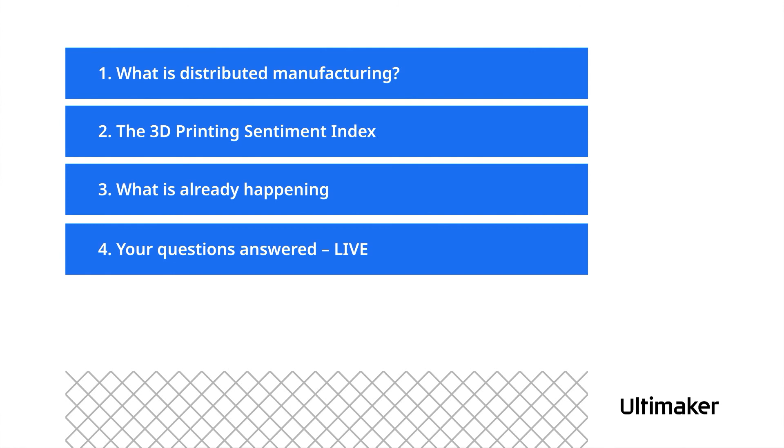We're going to share a favorite case of ours, the Schubert story, that we've shared as an Ultimaker story before, and that really exemplifies what's possible for this process. And then we're going to discuss with you ways that Ultimaker unlocks these possibilities with the Ultimaker S5 Pro Bundle.

Let's start out with the basic concept of distributed manufacturing. Now, some of the viewers have been practicing these kinds of techniques for years. You know Lean, you know a lot of the methodologies that have informed this. Others of you are hearing about this for the first time. So I want to get everybody on the same page so we can all benefit from this exploration. So I'm going to start with Ultimaker's mission statement. Ultimaker's mission is we are here to help accelerate the transition to digital distribution and local manufacturing.

Let's take a look at these terms from two perspectives, from the virtual and the physical. So digital distribution, creating digital parts and products and processes so that you can send them to various places. And then on the physical side, you can produce these parts where you need and how you need them. You can use the digital models that you have for the parts and the processes to help you actually make manufacturing aids as well that will help you to more easily produce these items.

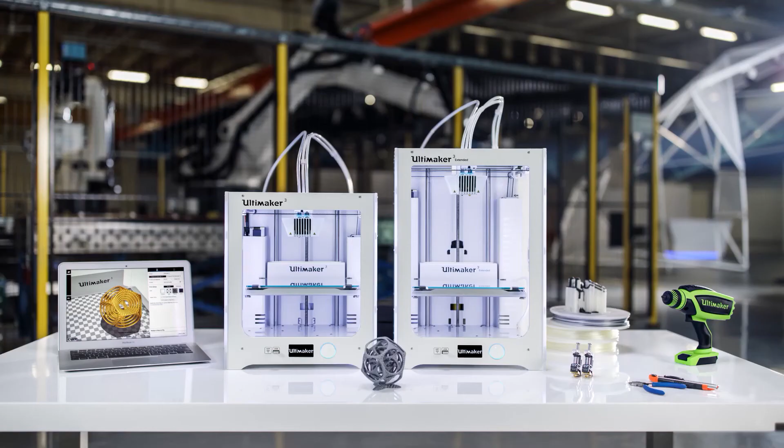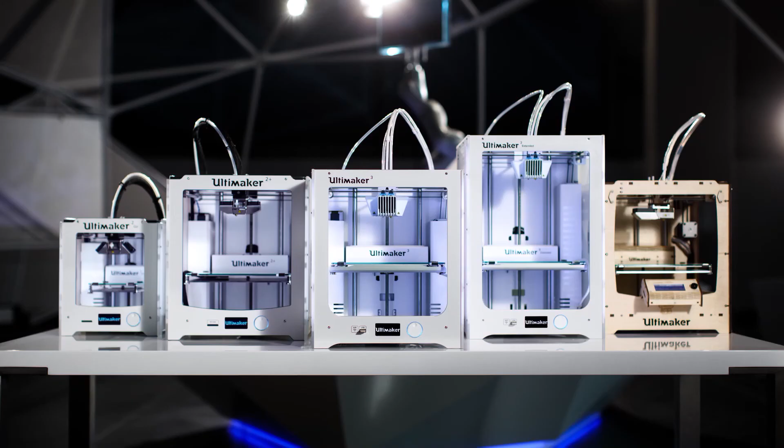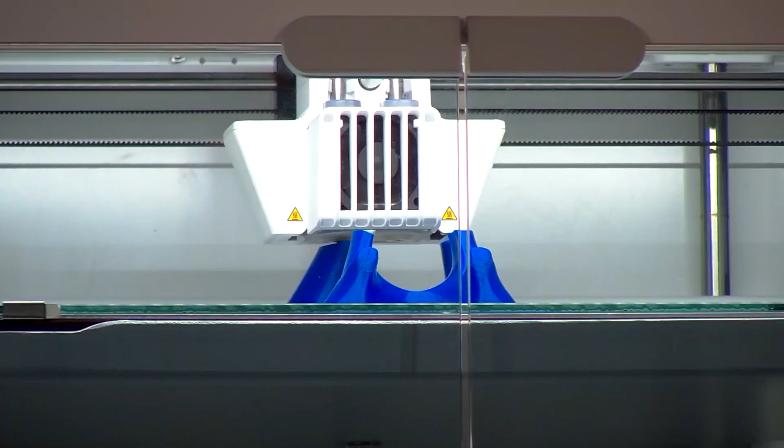So we discovered these concepts from working with our customers. From the very first years of Ultimaker, we started seeing Ultimaker Originals, Ultimaker 2 Pluses. We saw them showing up in all kinds of contexts, serving all kinds of roles that we didn't guess from the very beginning. And then with the launch of the Ultimaker 3, we saw a number of our units start to show up in manufacturing chains, in factories, and in global companies that were sending files back and forth for design review and part review and even fabrication guidance. So we really believe that this principle can make a difference.

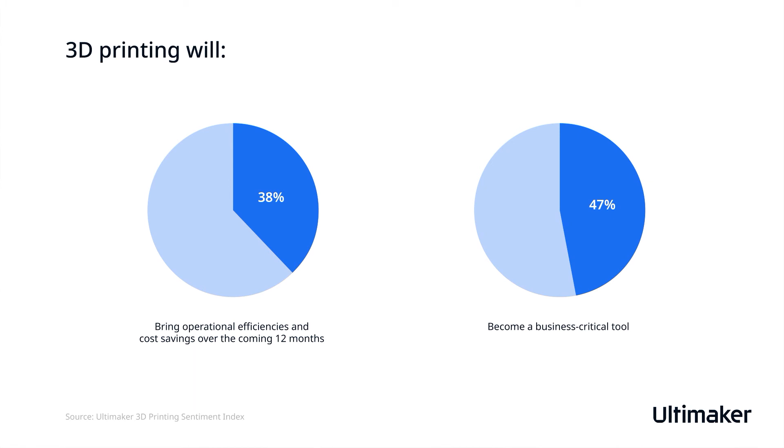To confirm our thinking around digital distribution, Ultimaker commissioned an independent research company to survey a wide range of professionals across the world. And this revealed that over 1/3 of the respondents expect that 3D printing will bring significant operational efficiencies and cost savings to their business over the coming 12 months. And almost half believe that 3D printing will eventually become a business-critical tool. So we know that our industry and growing customer base are demanding this route to accomplishing their goals. We really think that Ultimaker is a perfect candidate to help them carry this forward.

We're going to sit down now with an Ultimaker expert who's going to help walk us through some of the things that are happening even today to usher in this new era of distributed manufacturing. So I'm sitting here with our Ultimaker expert, Peter, and we're going to explore in detail a conversation about distributed manufacturing. So first, Peter, introduce yourself. What's your background at Ultimaker?

My name is Peter Overgouw. I've been with Ultimaker for over 6 years. Right now I'm the application engineering manager for EMEA. We are part of the business development team, and that means that we are working with the global OEMs, and we help them identify applications, and applications are 3D printed products, and we help them define a business case about these applications. So if we have these applications covered with a customer, we help them develop these applications and adopt 3D printing in the company.

So how do we bring distributed manufacturing to these customers? Distributed manufacturing is key for these customers. So of course we have to bring value to them. 3D printing has a lot of opportunity and it should be scalable for them. So it's all about being flexible, being able to print a part where you need it, when you need it, and this is what we can offer them. So Ultimaker, we offer the hardware, we offer the software and the materials, and also we provide our customers with the right knowledge to produce these applications, to engineer it, and we think with them about how to do that.

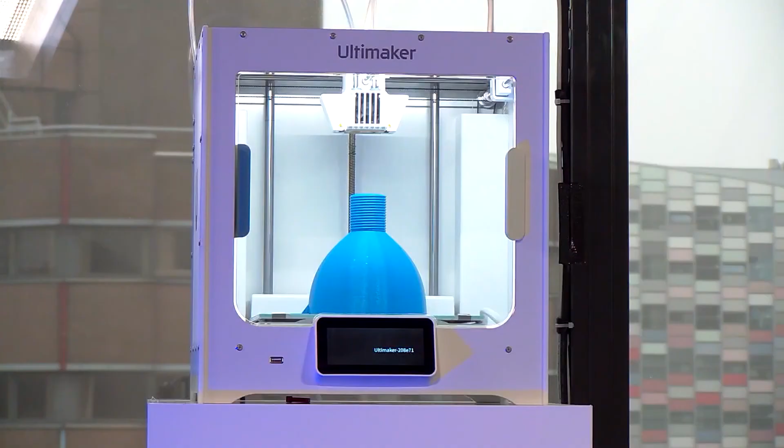So this way, we train our customers to do it, so they can scale globally to create a lot of value. So I want to start with the first signpost, this concept of the evolution of the supply chain. So how do you see the supply chain transforming for our customers?

So a lot of our customers have big lines, and it can be assembly lines, production lines, all kinds of lines. And what you see is that in all these lines, they have a lot of parts involved. It can be for automation, it can be for quality control. There are a lot of opportunities there. And you see that some of these parts may break down, or you need some new parts, really custom to your product.

And normally what companies were doing was, of course, designing the parts and ordering these parts at their manufacturers. And they had to mill it, they had to lathe it, there are all kinds of manufacturing techniques that they had to take on to produce these parts, and that took time. So of course you've got to analyze the model, you've got to prepare it for manufacturing, you've got to manufacture the model, and this all takes time. And in the end you've got to pack it and ship it to the customer who ordered it.

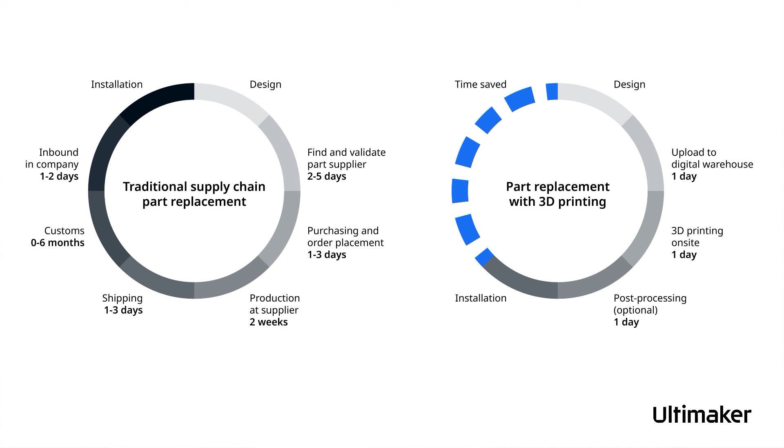And the thing is, what we're seeing right now is that they are adopting 3D printing more and more. So if you put a 3D printer next to your line where you need the part, you can imagine that it's a lot faster than ordering a part elsewhere. Because if you print it right next to your line, you can skip all this time loss it takes to order a part, because the part and the manufacturer should be in your financial system already.

If they're not in your financial system, they need to make that. They've got to create an account in their system. Then they need to order it, so probably it needs to go to purchasing, and then all the other steps I just mentioned with shipping, you can save because the printer is right next to your line. So basically, if you design it and you print it right there, you can save all this time to get it right out.

And when we were talking about this earlier, you were mentioning how sometimes these parts are made at an urgent time expense, sent rushed over to a site to use. They might even get lost on the way to find the person that needs them. So this really not only compresses a lot of the various steps, but the people who really need it are the ones that are seeing this process and making sure that the part is ready for them where they need it. I thought that was really an excellent concept.

Yeah, and to further your point, we even see with customers that they are moving up to a next level in their industry, getting parts in, but also working with their suppliers to improve 3D printing. So our customers are working with 3D printing already, but now they're asking their manufacturers to start thinking about 3D printing as well. So we can see that the adoption is growing, that companies are already thinking of 3D printing in the future and how to bring that forward with their manufacturers. So those time savings and optimization benefits are going up and down the traditional supply chain line as well.

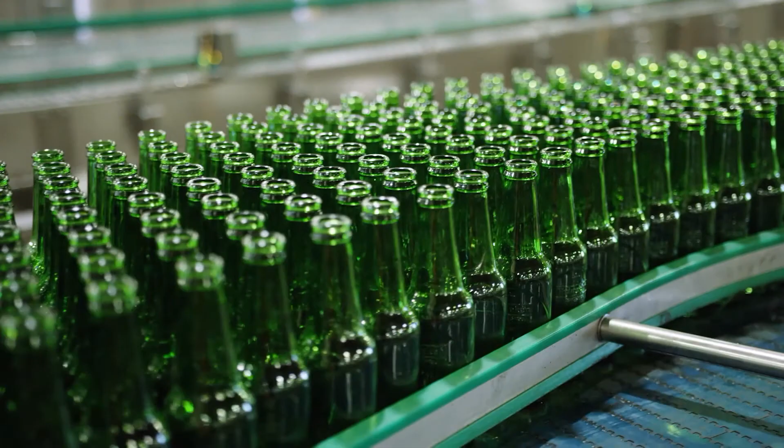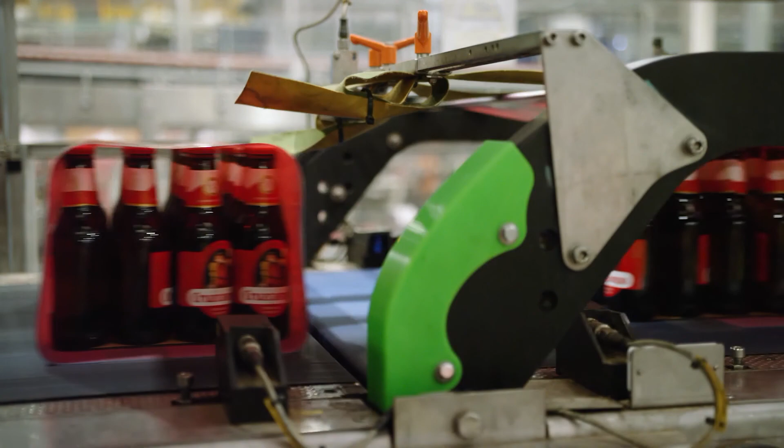Yeah, so what we do with all of our customers, and I think Heineken is a great example, is that, of course, we have a look with them. How do you identify applications? We look at what parts are you replacing, where are your costs, where are your issues in this line? Because sometimes if a part breaks down, it takes them a long time to get this part in, especially for the reasons I mentioned earlier.

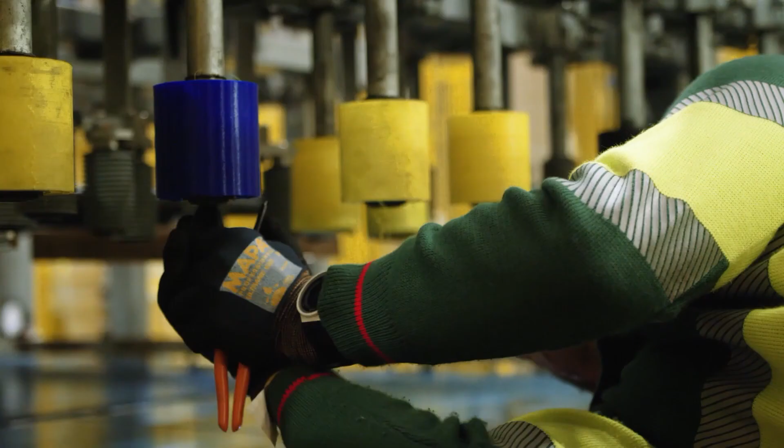But you can also imagine that if one of these Heineken breweries is in a specific location that is hard to reach, in a country where the organization is not that high as other countries, and a manufacturer ships over a part they ordered, it can even get stuck in customs, and the line is still broken down, it's not running, so it's costing them a lot of money to get it up again.

I remember hearing that for some of these distant sites, they're solving that problem by bringing manufacturing closer to the local need. They'll have a secondary facility just full of replacement parts, to make sure that local fabrication plant keeps running. And so when we talked about things going digital, let's talk about what it means to have a digital warehouse of all these parts that you can draw from. Where are you seeing that kind of strategy adopted among our customers?

We see that more and more. So the bigger customers we focus on, they really want to go global. So they have to open up these possibilities for their employees to 3D print these products. The thing is that it's not possible for everybody to create this design. So they really want to share this digital file.

And you can see with our customers, if they're growing and opening up multiple sites, they want to share their knowledge. So they're building these centers of excellence, or a digital warehouse basically, where there's knowledge, where there are these files, and they are making it possible for these employees to just download the file and press start on a printer right there on their location, and the part just comes out.

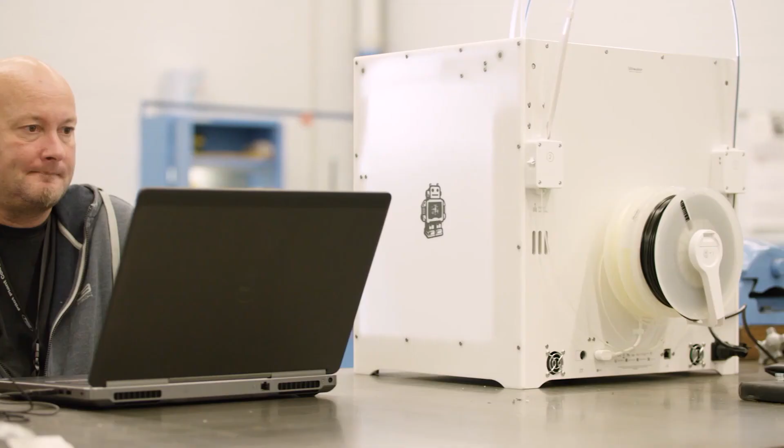Do you have any customer stories of people who are starting to explore using parametric parts right there for solving problems? Yes, definitely. So this becomes a bigger topic, of course. So like I said, it's not easy for everybody to design. So making it easy to design is critical. So what we see with, for example, Ford, they use Trinckle. And with Trinckle, you can just load a CAD file, you can just put down some points there and it generates a file. So it's really on dimensions and it's accurate, and then operators can even do it to generate this file and 3D print it right there.

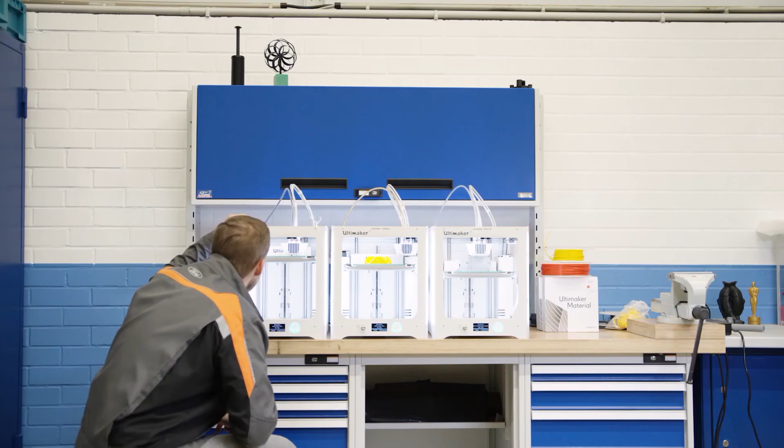When you're talking to customers about these opportunities, helping them as you're walking through sites and identifying things that help them understand how they can use 3D printing, how do you talk to them about this future vision of where they could go, and also about the examples that are already here in place among the other customers you're working with? Yeah, so at first when we go to these customers, often they have an idea of what they want to 3D print, but they do not really know how or anything. And then we see that they are already really focused on this application.

So at first we have to think with them. We've got to inspire them. So we think of like, what kind of company is this? What is all possible here? Because many times there is so much more possible than what they are already thinking about. And most of the times it's not that hard to do it. So we can already do a lot of applications they want to print with really basic materials, polymers. It does not even have to be metal. Often we are even replacing their metal parts with polymer parts because it's not really needed to use metal in some places.

So by showing them how easy it is and how plug and play the machine is, and everything we offer gives them already a good feeling about 3D printing. Of course, the next step, like inspiration, is that they can grow this, they can scale this to different locations. And you can already see that with some companies we are working with, they are really thinking about the future. How is 3D printing going to look in our company?

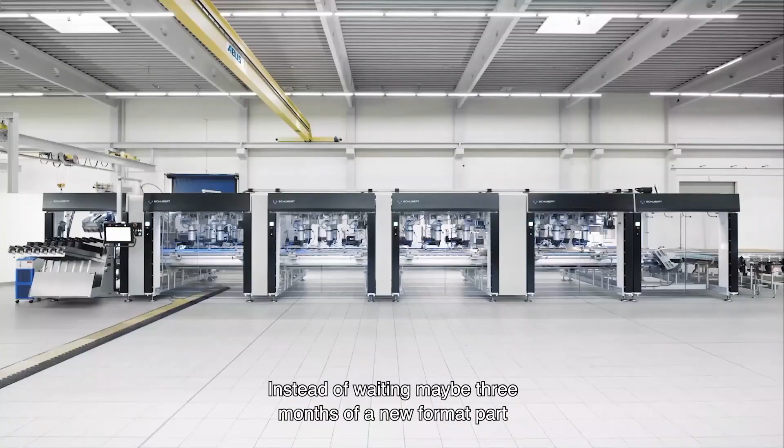Instead of waiting maybe 3 months for a new format part, we are now able to send him the file within 2 weeks. So we reduce the cycle time enormously.

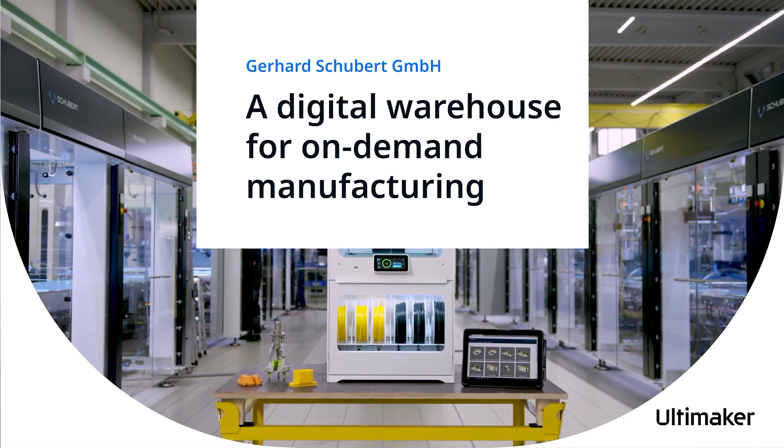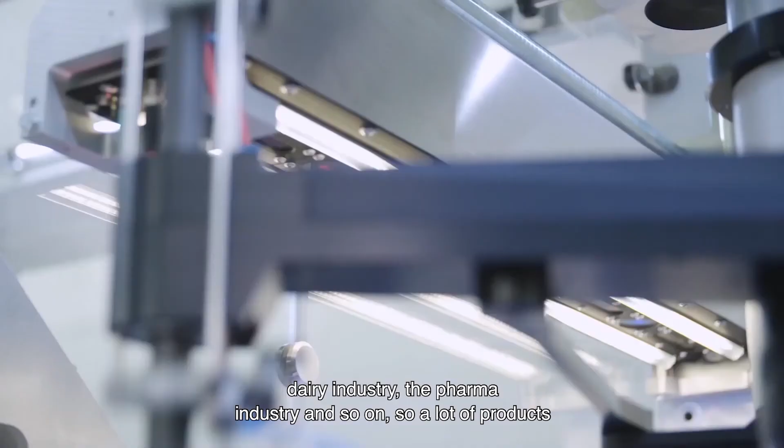My name is Markus Schindler. I'm responsible and head of the materials management here at Gerhard Schubert. Schubert designs and builds packaging machines for the food industry, dairy industry, the pharma industry, and so on. So a lot of products from the supermarket get packed by a Schubert machine.

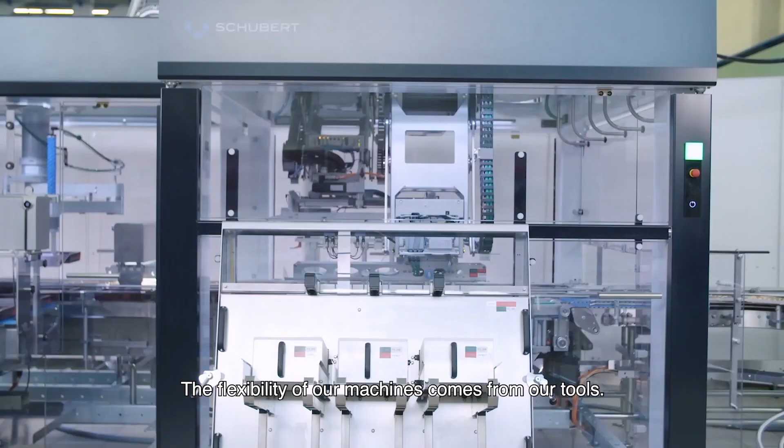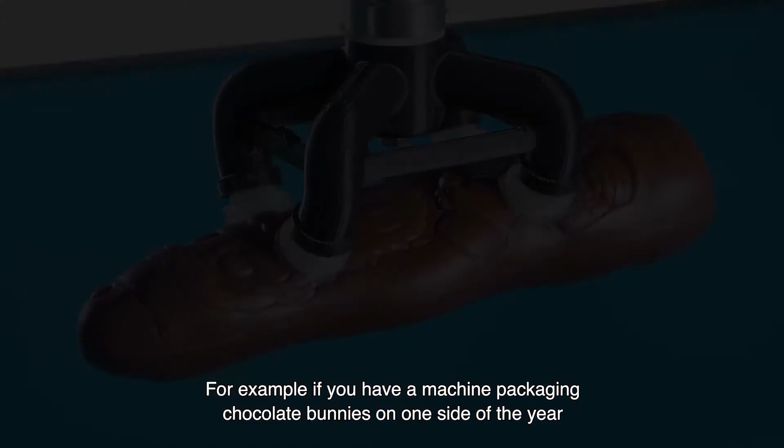The flexibility of our machines comes from our tools. We set up tools on our robots, and the tools are as flexible as the product itself. For example, if you have a machine that's packaging chocolate bunnies one half of the year, and then the other half of the year chocolate Santa Clauses, you only have to replace the tool.

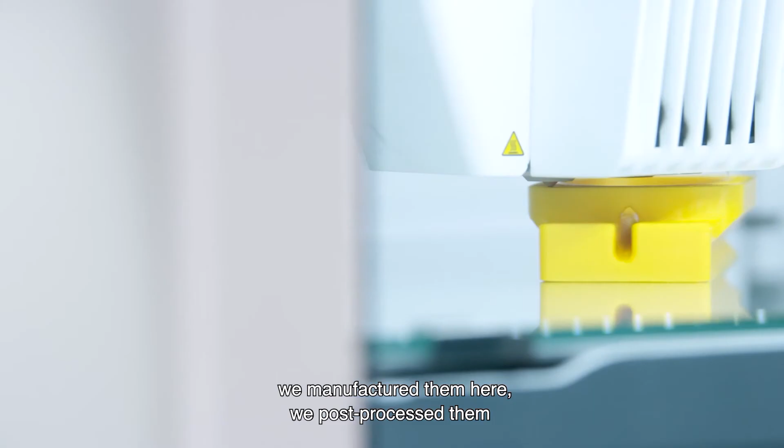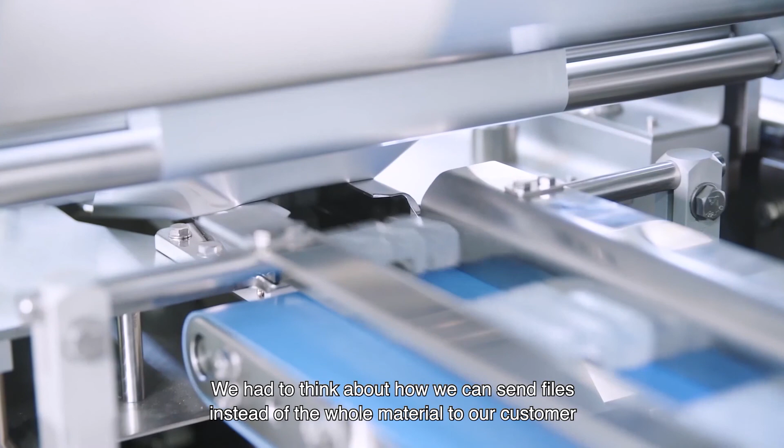Originally, we started delivering the parts as a conventional part. We manufactured them here, we post-processed them, and then we packed them and shipped them to our customers. And the problem was that sometimes the whole process was longer than in a conventional process. We had to think about how we can send files instead of the whole material to our customer. The customer should not slice anything or do anything in a software, just click and print.

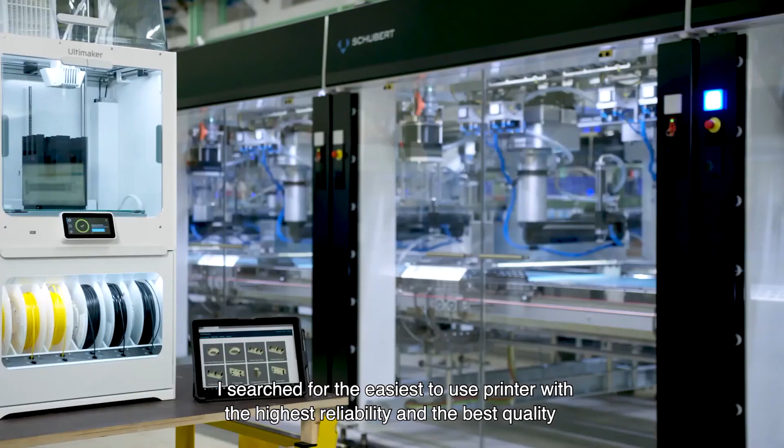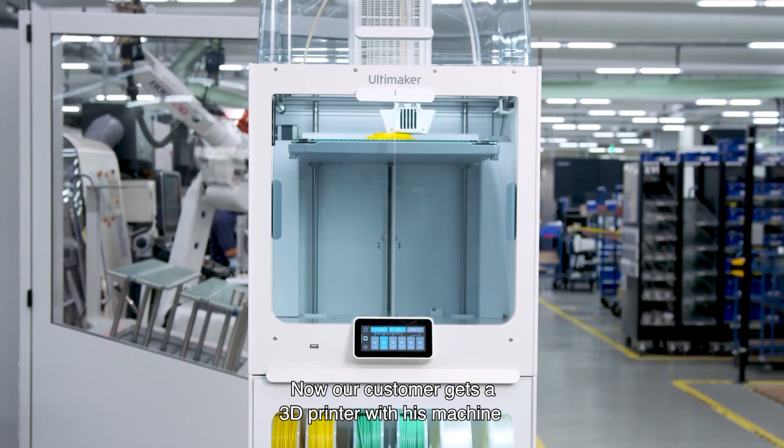As we began thinking about sending certified printing jobs to our customers, I searched for the easiest to use printer with the highest reliability and the best quality, and there I found Ultimaker. Our customer gets a 3D printer with his machine, and we connect the 3D printer with our digital warehouse. We slice the part with Cura and adjust all the parameters.

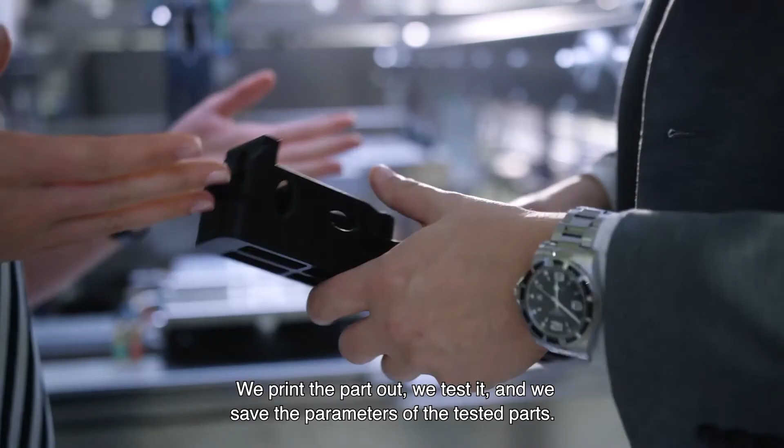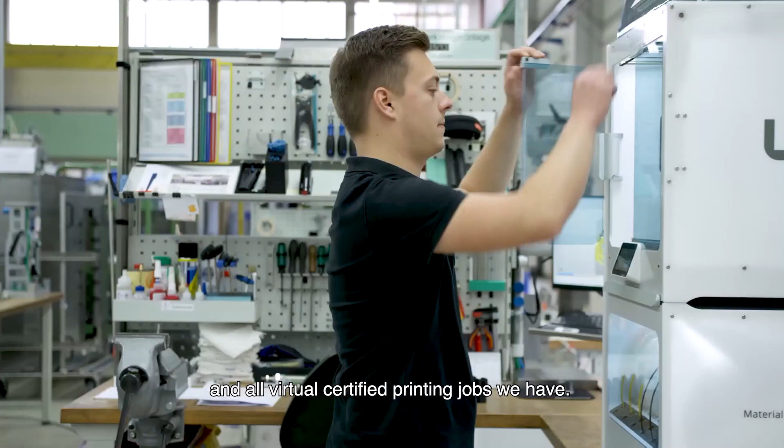We print the part out, we test it, and we save the parameters of the tested parts. And this certified printing job we upload to our digital warehouse. A digital warehouse is a storage of all virtual parts and all virtual certified printing jobs we have. Our customer is able to search for parts, to store the parts digitally, and to print parts on demand from the digital warehouse directly to the connected printer.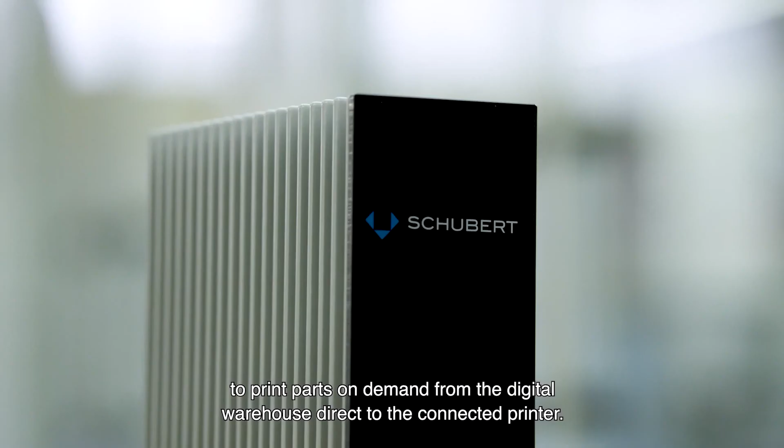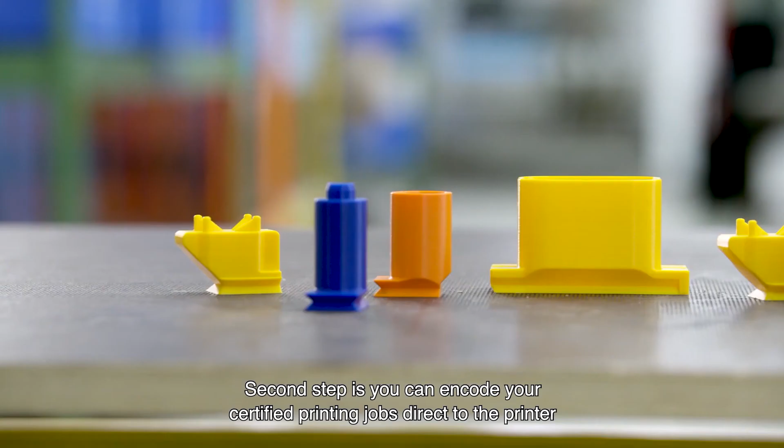And the security is the most important thing. That's why we have an IoT gate directly at the printer. Second step is you can encode your certified printing jobs directly to the printer. When the customer wants a new format part for a new packed product, for example, he sends us a 3D model of the packed product, and from the 3D model we can design the new parts.

After that we create the certified printing job and upload it in his digital warehouse. After that he is able to produce it on demand. It's our task and our solution to help him be able to click and print. So the Schubert case from the packaging industry really represents a major leap forward towards the future of distributed manufacturing, and a great example that we really highlight among our customers for where this is going.

So let's take a moment and quickly review the things that we covered about distributed manufacturing in this webinar so far. First we have the concept of changes to the supply chain, making what you want, when you want, where you want. Then we have the concept of going digital, that we're making our products using digital tools, connecting them with digital processes, and Peter's notion of creating the recipe, getting the recipe to where it needs to go, and being confident that you'll have a beautiful cake produced as a result.

Then we flip that around: you have a recipe for the product you're making, so you also have enough information to make manufacturing aids to make that process more efficient. And you can even produce those right where you need them, right at the factory line, and make changes. And the last topic, you can potentially have a digital warehouse where you have all of these parts ready to go. They've been validated and checked.

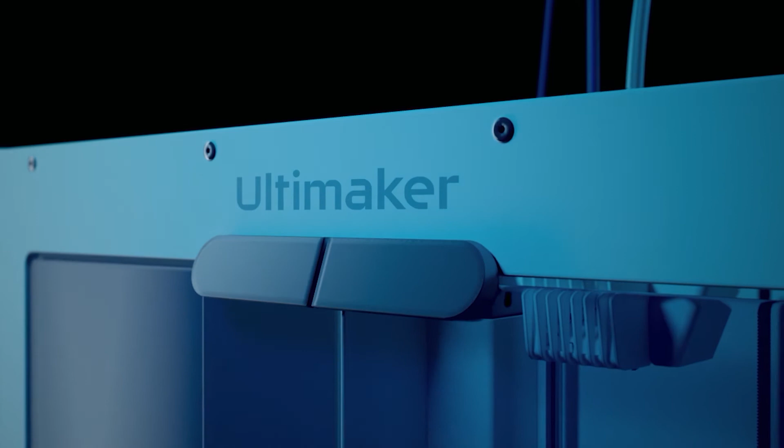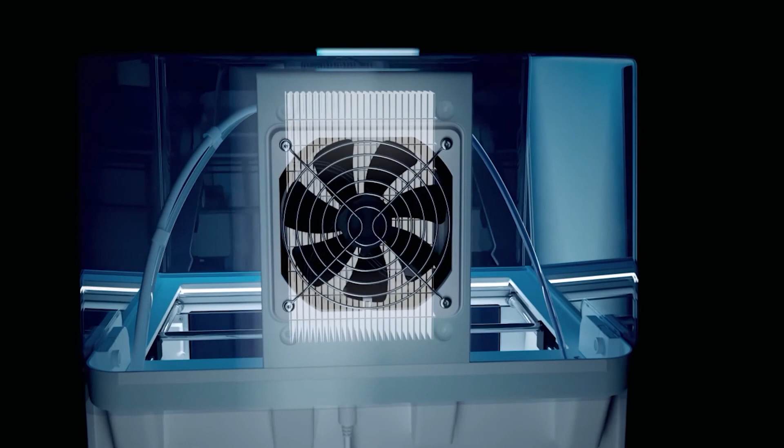With everything we discussed, the Ultimaker S5 Pro bundle represents most of these points. With the S5 Pro bundle, it's really a machine that you can put right next to your production line and connect to your network. With that, you can contact the digital warehouse, download your part, press start, and get the part out. And the best thing about the Pro bundle, it's not just the basic materials, but with the Air Manager and Material Station, you can even print really high technical applications.

Oh, that makes perfect sense.

So even though the idea of distributed manufacturing has a future trajectory that we're really excited about, there are already things you can immediately do today to transform your business, to optimize your processes, save money, and have the parts that you need where you need them.

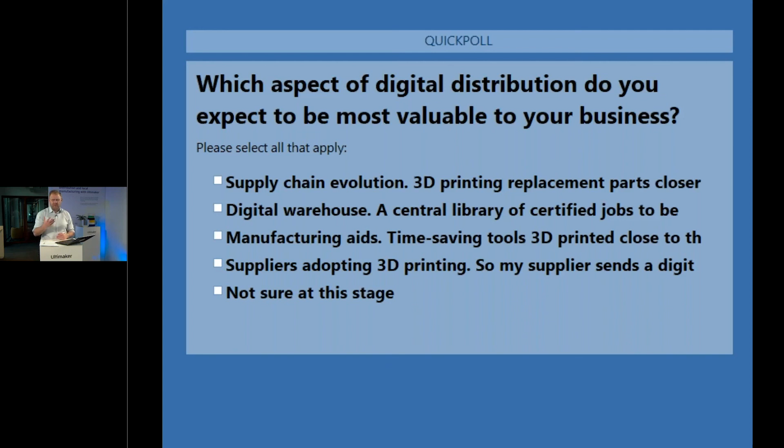In the case of Schubert, yes, Schubert has been building this. Of course, we assisted in that. At the same time, it is very interesting to see that several companies are doing this themselves too. But we will also start investing in more generic facilities for Cura users to start using this facility. It is perhaps interesting now to tell a little bit more about our software strategy in that respect. In the end, our mission is to accelerate not just local manufacturing, but also digital distribution.

And so what you will see in the forthcoming period to enable this is actually 3 steps or 3 values that we will start developing. The first one is the ability to create certified print jobs faster, so with, for instance, simulation, with optimization. The second one is the digital warehouse, and then particularly the capability to distribute these print jobs in a safe way. And thirdly, there's the ability to control this whole setup and make sure that the right users have access, that there are user and production reports, that sort of thing.

So yes, today we see several implementations of warehouses being made by early adopters. We love seeing that. We love to learn from that. And at the same time, we will come up with more generic facilities to make sure that you can actually do this in your own company as well.